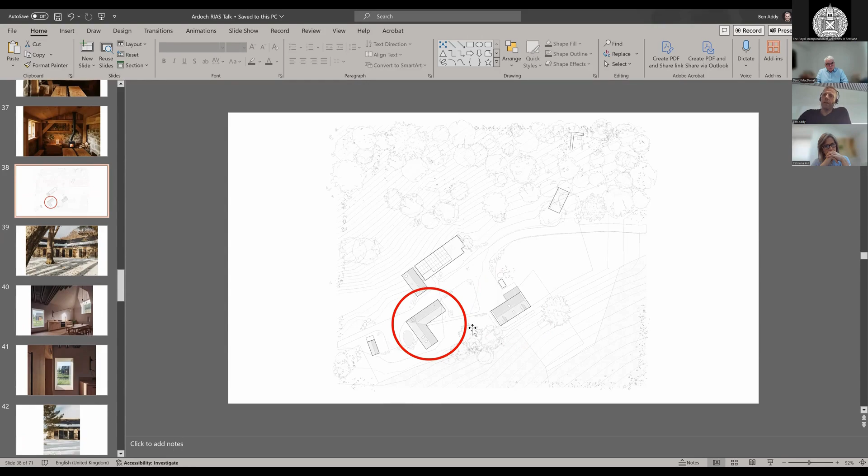So I think the two most recent buildings on the site are the one here highlighted in the red circle, and another just above it where my mouse cursor is - respectively a guest house for friends and family, and then a greenhouse, which we'll come to in a moment.

And I suppose the guest house really encapsulates the approach that we've taken throughout, and it's very much working with what's there and not imposing any kind of architectural concepts or ideologies that would detract from the original fabric of the building. So it's a sort of sensitive repair in that sense, but working with the fabric, exposing the potential of these beautifully built structures.

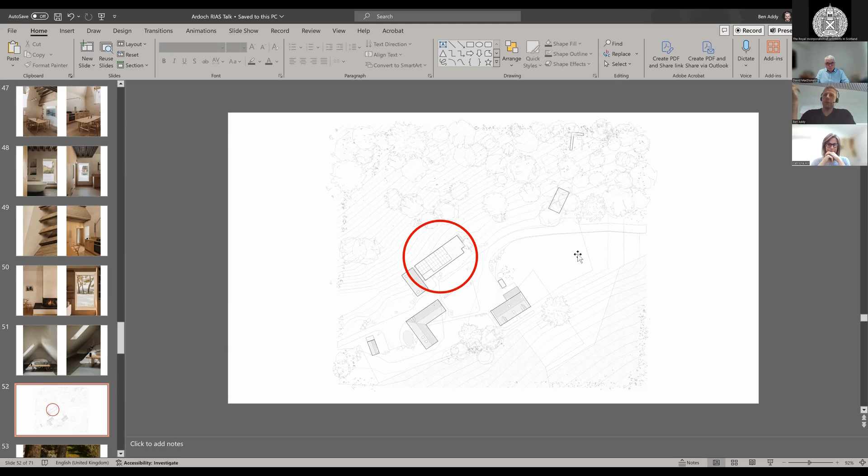I suppose of all the buildings on the site, of which there are 8, and I could talk about each one, the most prominent in terms of a kind of overtly architectural approach would be the greenhouse, which is to the north of the site, as you can see circled here.

But in retrospect, it seems rather obvious. The hillside faces southwest, so you have almost the full track of the sun. Certainly in summer, you have the full track of the sun as it rises above the hillside behind and comes down into the top of this site.

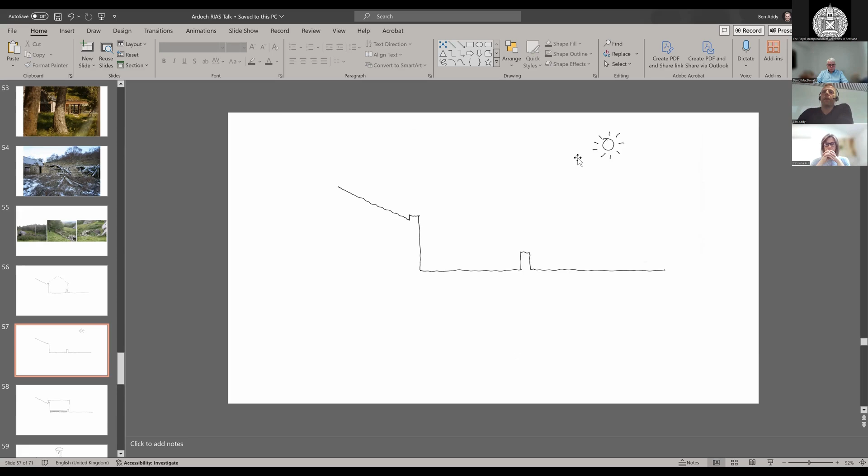So the obvious thing to do, of course, is to build a greenhouse. You've got a retaining wall in granite, which is insulated by Scotland, if you like, on the backside, but is a tremendous thermal mass. We can put in a new floor between the two remnant parts of the structure and then simply enclose it with glass.

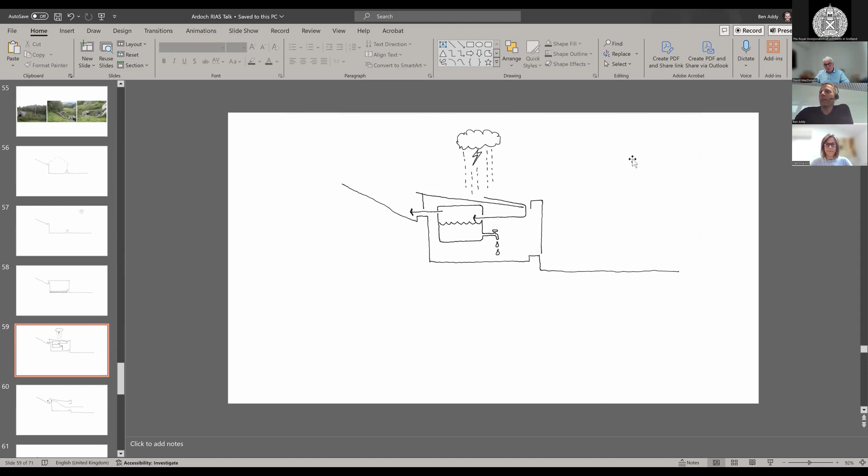If we then use that roof as a rainwater harvesting device - we actually suffer from, believe it or not, droughts here in this part of northeast Scotland because the Cairngorms absorb a lot of the rainfall, and we're in the rain shadow, if you like. So by using the building as a rainwater collector, we obviously have the potential for stack effect and ventilation, so passive ventilation through the structure.

It's been brought together in a really low-key and quite delicate way, certainly in terms of how the exterior has been detailed and constructed. It's all about the precision in the craft and how the junctions have been resolved very precisely by the joiners.

Some of my colleagues, when they visited from London, referred to it as a one-to-one scale model—an architectural model writ large. Not only had we been developing the building while it was being constructed, developing the design as you would with an architectural model, but also the precision in terms of the placement of screws and exact coordination. So it has that sense of being a very precise but quite low-key intervention.

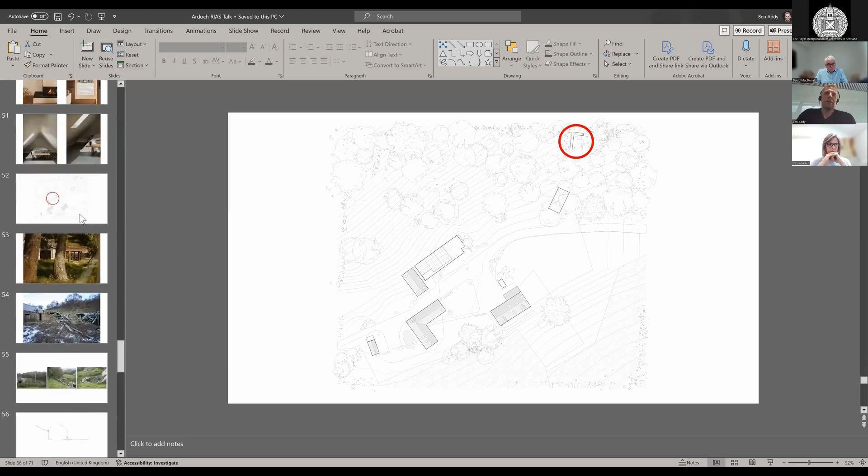There are several other buildings on the site, and it's kind of difficult to know when to start and stop the story. But one other I'll show is one which I built myself—a self-build project on the site of what was actually the oldest building on the site. The farmhouse was built around 1856 by the Dugard family, who were the first tenant farmers on this part of Invercauld.

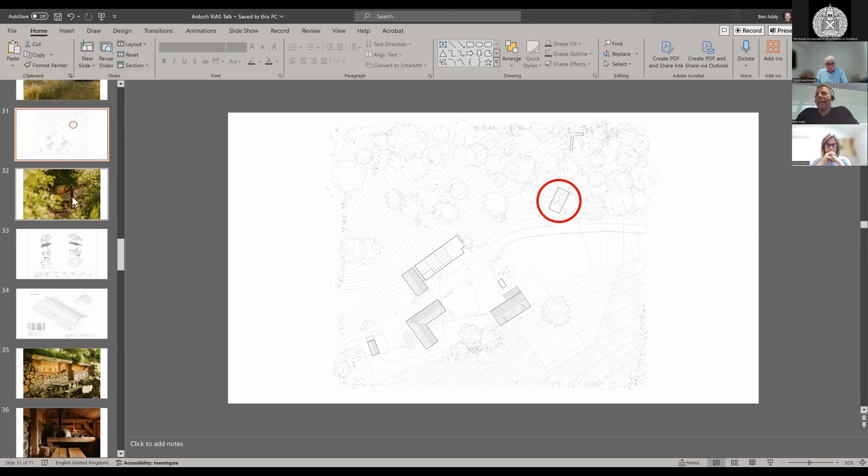But prior to that, there were farmers operating from what we call a black house. It isn't really a black house, but a small building that would have had a thatched roof, to the rear of the site, probably the most sheltered part. When we moved there, this was just used as a midden, full of pots and pans and old leather shoes and what have you. But the perimeter of the walls was still intact.

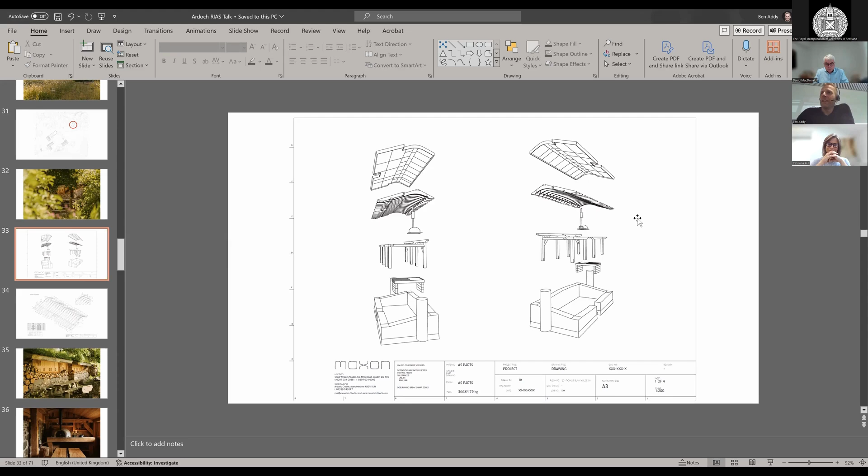And then the interior is something that, again, has been developed in the way we would develop an architectural model—developed by hand, organically, learning from the process, learning from the interface between different structural components or different materials, and then adapting and amending. So it's been built, like I say, by me, but in a very organic fashion.

And of course, we have dinner here quite frequently, actually, and you can spend an hour in here in winter and it feels like you've been tucked away for a week. It's a really wonderful place to escape to.

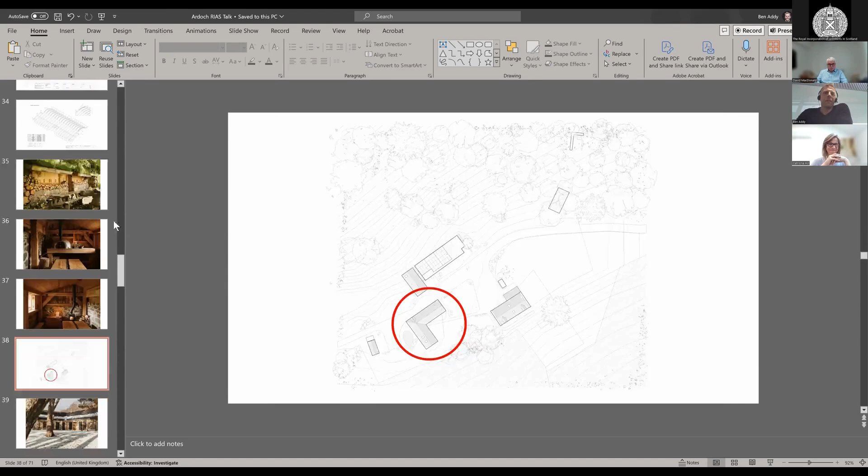I suppose the final little bit that I'll show you, if I scroll down here, is just up in the woods from the black house.

There's another kind of fragment of building. It's got this really wonderful feeling because you're going up into this woodland, the triple SSSI of Crathie Wood. You can see the pathway in the bottom right-hand corner of the slide, and that leads you up to this fireplace.

So this chimney was yet another building on the site, the 8th building, which was at one time, I think I may have mentioned, the Queen's seamstress used to live here, in this building, or rather a timber shack arranged around this fireplace.

Now the shack was a pile of rotting timber by the time we moved there, but we've rebuilt the perimeter here. Stuart Urquhart, stonemason, has rebuilt this perimeter with stones from the hillside behind. So we've reinstated, or left a memory of the place. Again, it's a wonderful place to while away an evening in the woods.

Apologies, this was probably quite disjointed, not least because of the mishap earlier on with the technology.

But the point I want to reinforce is that these buildings have been repaired and rejuvenated and brought forward for the next century or so through a process of piecemeal repair and organic development of the design, often using the building as a one-to-one model. And I think the thing we always come back to is that we are just passing through and passing these buildings on to whoever knows in the future.

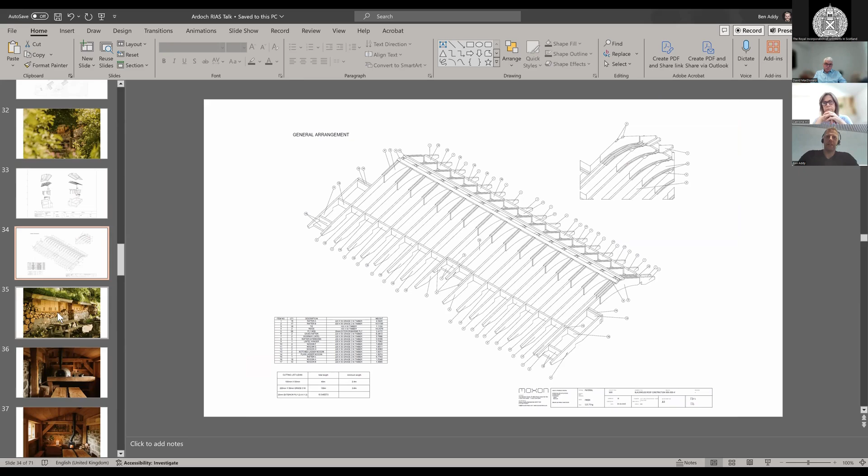So I'll show you the construction drawing. You can see here, this is the framing of the roof, which is again C24 and some plywood gussets at the ridge there. So I cut all these gussets from a template with a jigsaw and then screwed them all together, so the entire frame is kind of self-contained, if you like. It's then skinned with plywood on the top and then softwood tongue and groove on the bottom, so it is a kind of rigid drum that then sits on top of the Douglas fir frame that you can see here.

So it's a kind of a curious structure in a way, because you've got this roof sitting like a top hat, if you like, onto the kind of trabeated structure of the Douglas fir. So it's peculiar in that sense. You could have actually mounted it on a much lighter structure, because that roof is sort of a diaphragm.

There's all sorts of interesting things growing on this roof, because of course the roe deer can't get up onto it. So we're finding all sorts of beautiful wildflowers and succulents and all sorts of things growing on here that otherwise would be browsed. So yeah, it works. Technically, it keeps the rain out. It's not fallen down yet, and it's quite a lush kind of environment. It's a great place for sunbathing, actually. You climb onto the roof and you can lie there all day.

That's a great solution for biodiversity, to create a roof that the deer can't get onto.